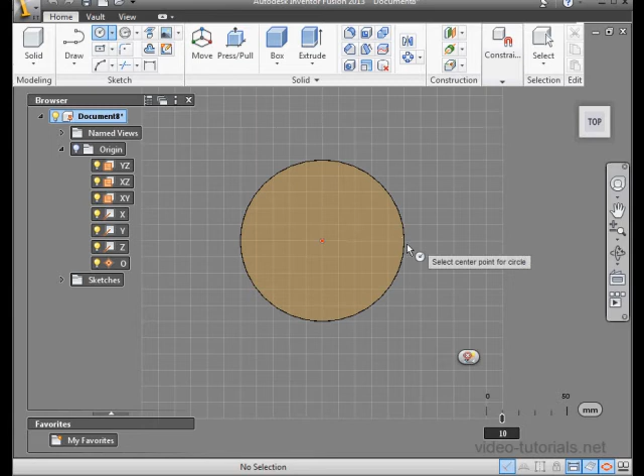I've just created a new sketch on the XY plane and I've taken a top view using the view cube. Let's activate the circle command. And we'll create another circle, 10 millimeter radius here. The last one will have a 15 millimeter radius.

Next, I'll create a slot for the locking mechanism and the pin. This circle will be 20 millimeters in radius. Let's create a line here, 50 millimeters, at 150 degrees. Now I'll use the offset tool. The offset distance will be 3 millimeters, and again 3 millimeters in this direction.

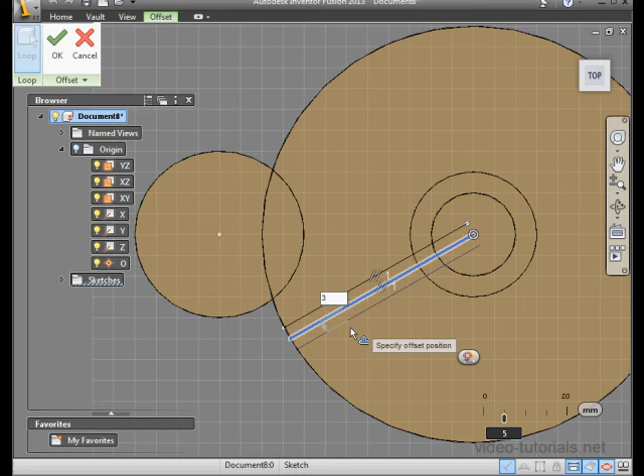And let's click OK. Now activate the draw command. This line here will be 20 millimeters. Let's activate the circle tool again. We'll create a circle here with 3 millimeter radius.

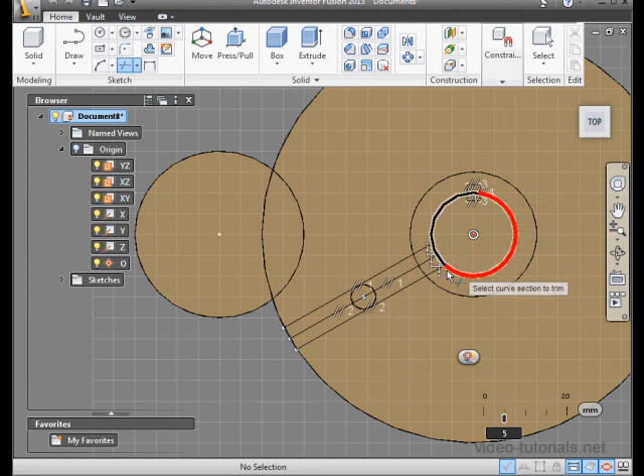I'll use the center point rectangle tool to create a keyway slot now. I'll dimension it at 4 millimeters by 3 millimeters. Tab, 3, press enter. Now let's trim our geometry with the Trim Entities tool. Just clean up some of these lines, and then we'll be ready to extrude.

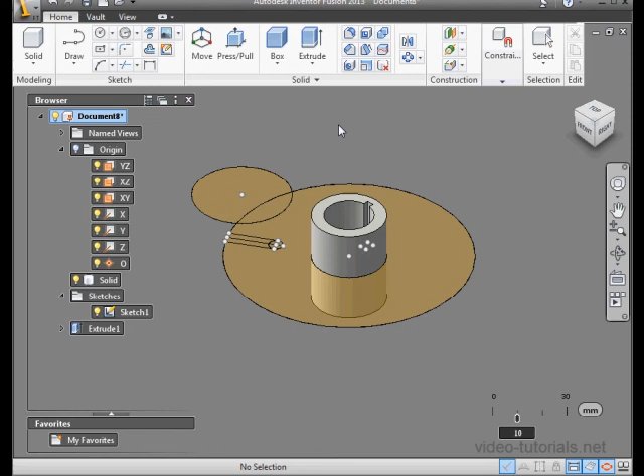Let's take a home view, extrude command. We'll select the hub region, create a symmetric extrusion, 20 millimeters in depth, and accept. Let's bring sketch 1 back and create a second extrusion now. This one will be symmetrical also, 2 millimeters. Enter, and let's hide sketch 1.

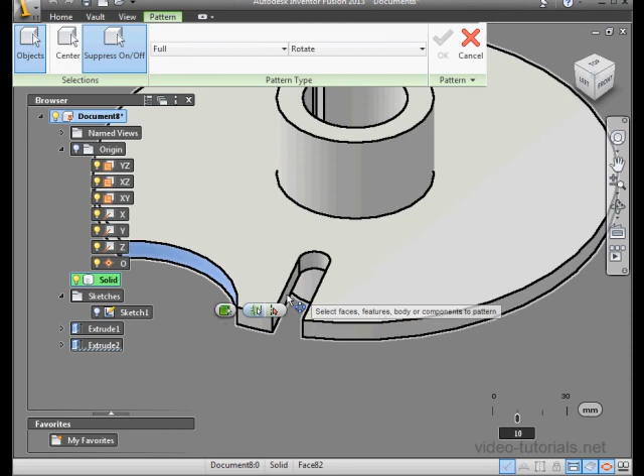Now let's activate the circular pattern tool. First, I'll select the feature to pattern. These faces here. Just zoom in a bit so it's easier to select. And I'll rotate the model a little using the view cube. And back to home view.

You may have noticed that, unlike my other exercise tutorials, in this tutorial I didn't create a cut extrusion in order to create a circular pattern. Inventor Fusion's actually smart enough to understand that that's what we want to do.

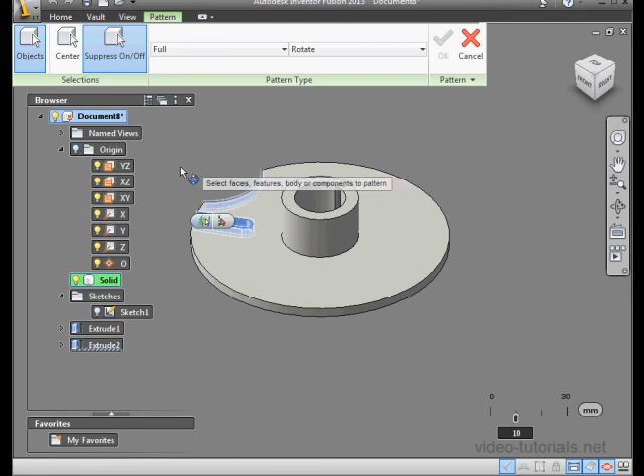All right, let's get going. Select the center. Select the circular face. The number of instances, 6. And let's click OK. And here is our Geneva wheel. And this concludes this Inventor Fusion exercise tutorial.